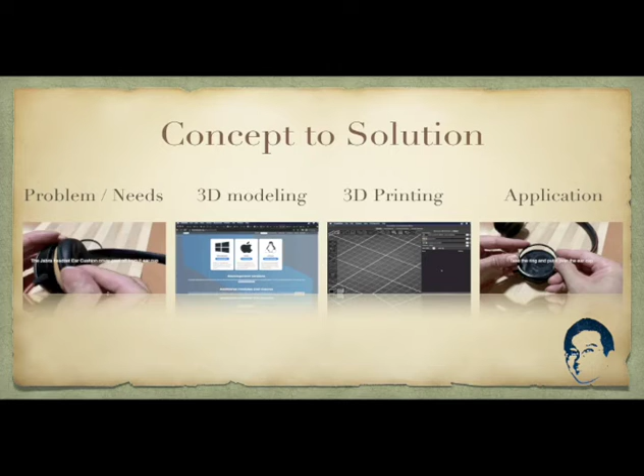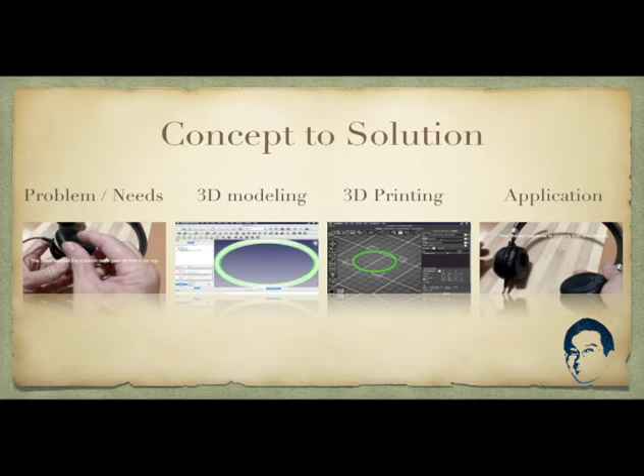In this video, I'm going to touch on how to model a Jabra headset ear cup ring as a cover, since the ear cushion has started to peel off from the ear cup due to usage. After some months of usage, the cover peeled off from the cup. There's no replacement available, so either I can tape it, which doesn't look very good, or get a new headset, which creates environmental trash since the headset still works. The other alternative is to model a ring that can hold the cover back onto the headset and continue using it.

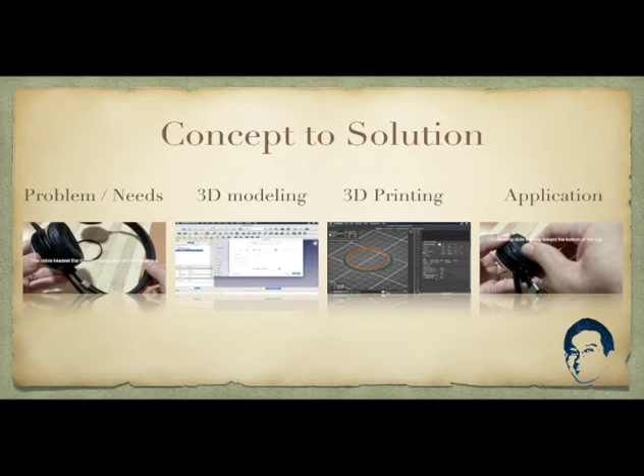Let's get started with the 3D modeling of the ring for the headset ear cup cover. Start your FreeCAD. If you don't have a copy, go to freecadweb.org, where there are installers for Windows, Mac and Linux. In FreeCAD, select the Part Workbench, then create a new document by going to File, New, or clicking the New Document tool on the toolbar. In Part Workbench, select the Torus tool.

For this torus, set the first radius to 28.5 mm and keep the second radius at 2 mm. Add another torus, and for this second torus set the first radius to 27.5 mm, keeping the second radius at 2 mm as well.

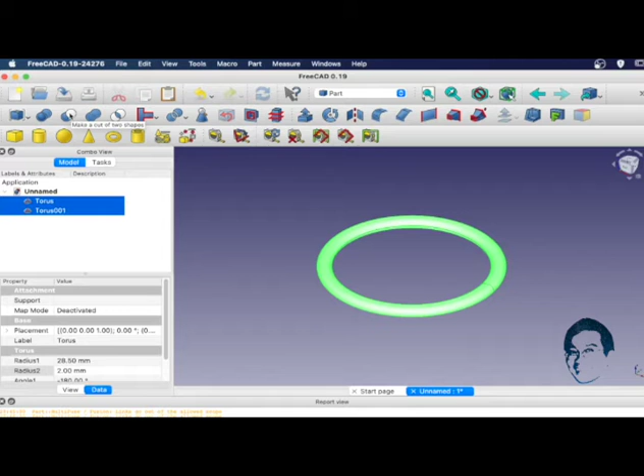Next, select the bigger torus followed by the smaller torus, then on the toolbar use the Cut tool. Click on it and the torus will be cut as shown, with a concave inner side and a convex outer side. This is the ring we want to create, so that the concave area will hold onto the ear set.

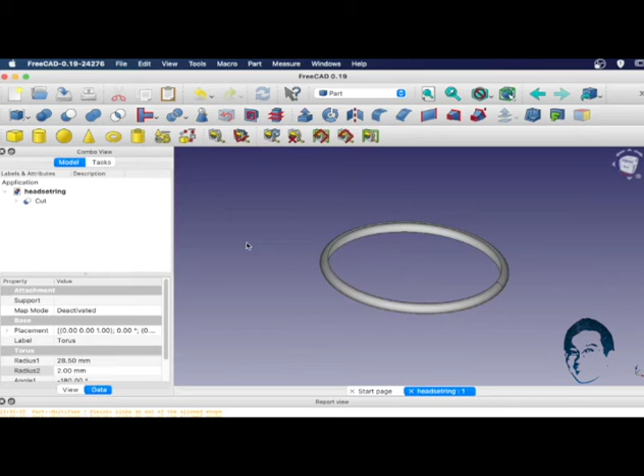That's easy, in fact this is all we need to do. Next, we save this file as headset ring. Then select the object, export it to STL format, and name it headset ring as well.

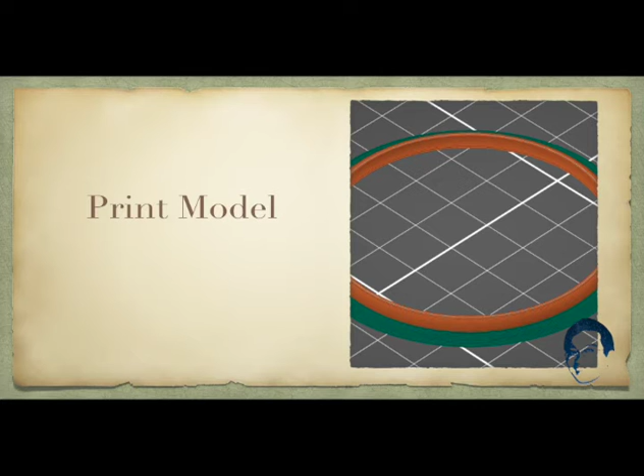With the 3D model done and exported to STL format, we're ready to import it into the 3D printer slicer software. Open the slicer, click Add, select headset ring.stl, and open it to import the ring into the slicer. We'll be printing this with PLA filament, since I only have black PLA for the headset. If you have TPU or TPE, that would be better, because the printed ring will be more flexible and easier to fit onto the headset.

The infill setting can be anything, because the ring itself is very thin so it will always print at effectively 100%. The other thing we need is the brim, which ensures there's a brim printed to hold this ring during the print so it doesn't move about while printing.

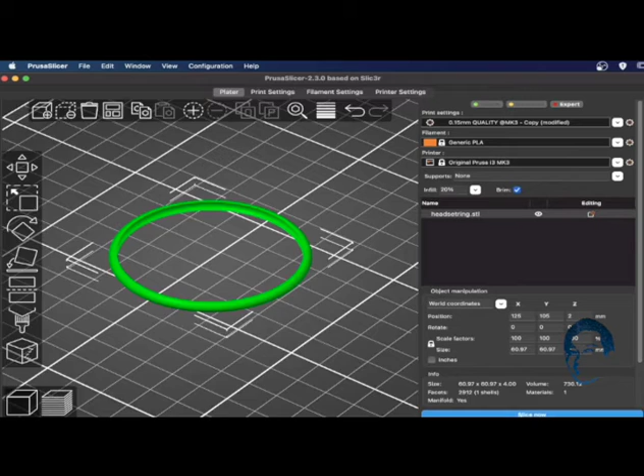With that, just click Slice Now, and that's how it looks. The dark green color is the brim printed to hold the ring during printing. To see how each layer looks in the slice, you can drag the orange color bar on the right up and down.

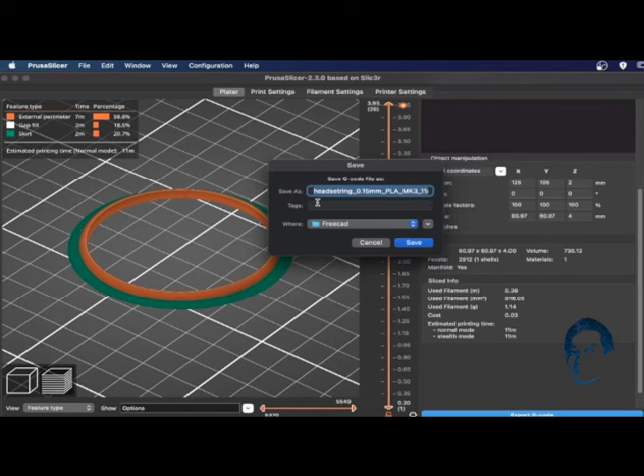On the bottom right panel, you can see that printing this ring will take 11 minutes, and the required filament is about 0.4 meter. When everything is okay, click Export G-code to export to the printer format. You can take the default name or type your own, then save it. When the export is complete, a message will pop up showing it's done. Now you can copy the G-code file to your 3D printer and get a ring printed.

With the 3D model printed, let's get the ear cup cushion cover back into position. Take the printed ring, put it onto the headset ear cup, and slowly slide it down inward onto the ear cup. Pull the cover through slowly. Now you can see the ear cup cover is properly held back in position, and I can continue to use the headset.

Let's recap what we covered. I have this Jabra headset whose ear cup cover was dropping off. We used FreeCAD's Part Workbench to model the part with torus and cut tools to create the ring we need. Once the 3D model was completed, we exported it to STL format to use in the 3D printer slicer software for slicing. Finally, with the printed part, we put the ring onto the headset ear cup and got the cover to stay in position.